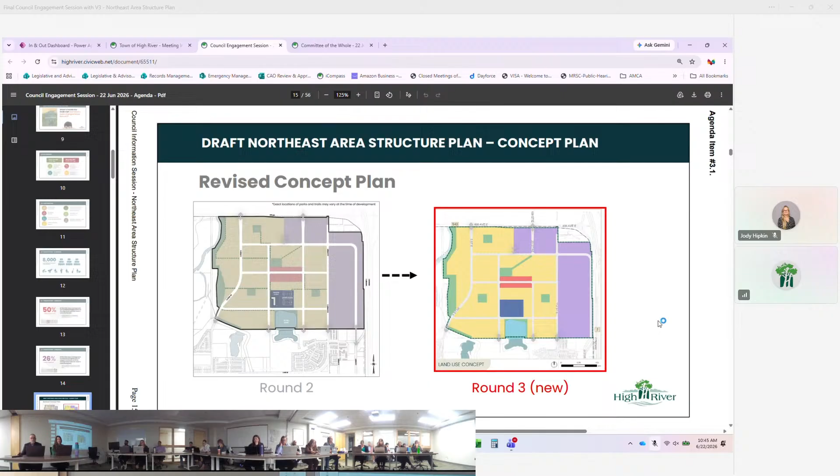This was the concept plan from round 2, and then it shows how the plan has evolved to round 3 after presenting 2 potential designs to the committee of the whole. The following slides will go through those changes.

The frontage road has been pushed closer to the highway to avoid conflict with development that has already taken place. We are still investigating the pipeline easement.

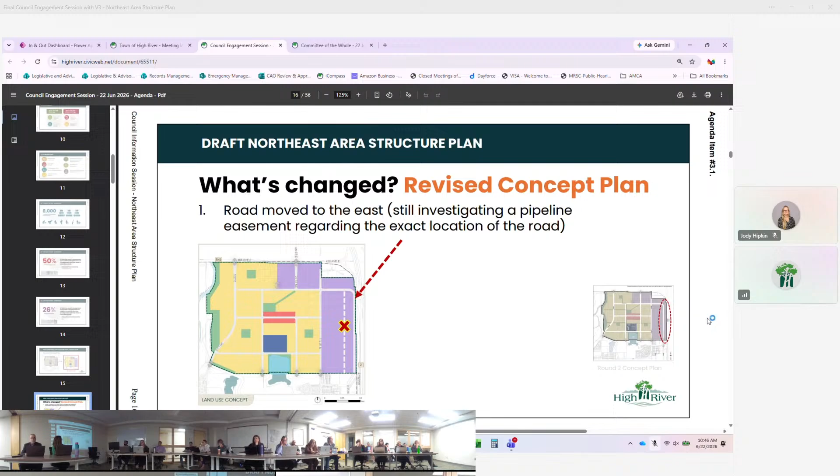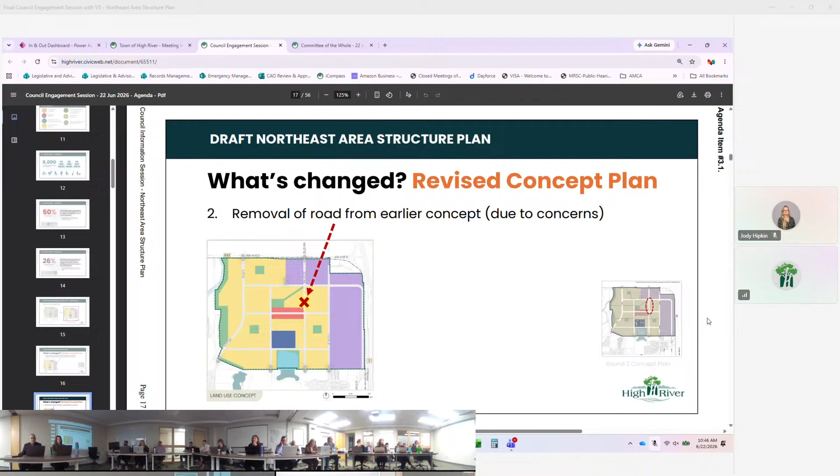20th Street Northeast is no longer shown as a through street, and that is to prevent trucks from taking that route directly south through a residential neighborhood.

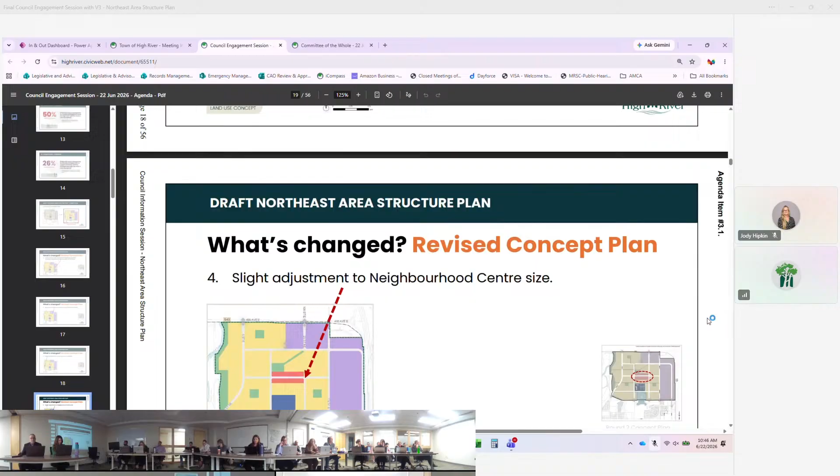The green space on the west side has been adjusted slightly. And the size of the neighborhood center area has been reduced.

Next, we will go through some policy highlights, and we will focus on these key sections throughout the next slides.

For traditional neighborhood district policy highlights, this land use is going to allow for a mix of residential, home occupations, institutional uses, and neighborhood scale retail consistent with the town's land use bylaw. The minimum density is 20 units per hectare, and that is in accordance with our town plan.

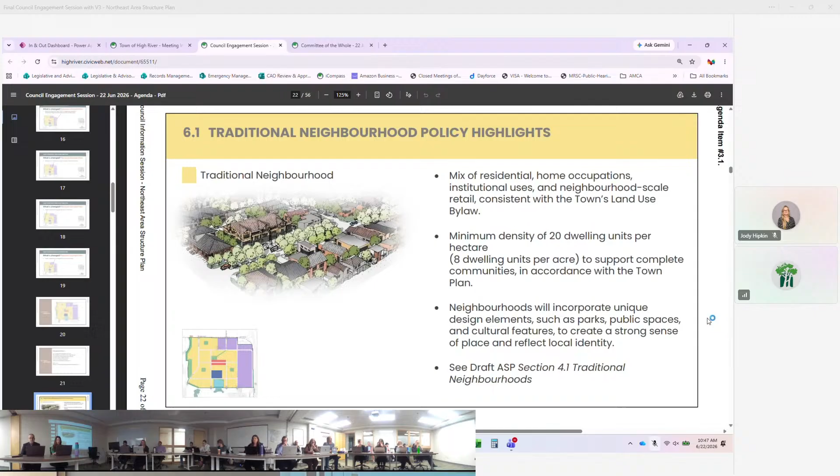Neighborhoods will incorporate unique elements such as parks, public spaces, and cultural features to create a strong sense of place and reflect local identity.

The next slides will go through employment area policy highlights. There are two employment areas within this area structure plan, employment area 1 and 2.

When redevelopment occurs, any new development must comply with the policies and requirements of this ASP. When a property is subdivided or a development permit is issued, landowners will be required to dedicate any public road right-of-way identified in this area structure plan.

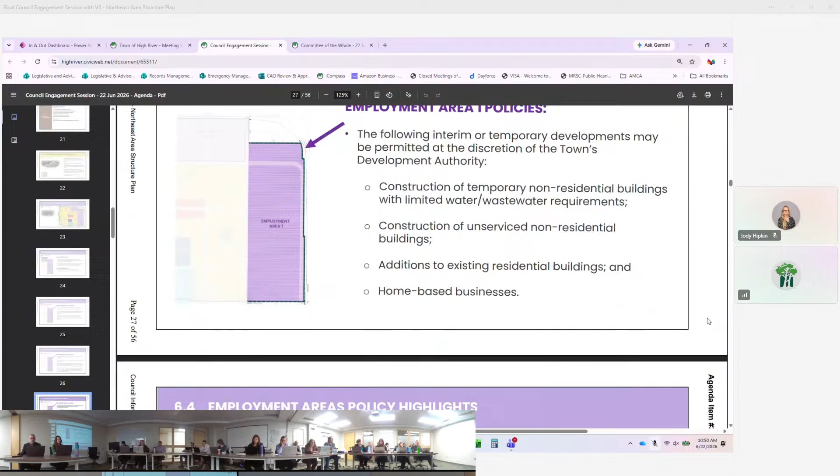At the time of subdivision or development, landowners must provide the town with a concept plan or master plan for the subject site and show how that site and the proposed development will connect any adjacent sites and future roads and developments.

Next, we will pivot to employment area number 2. All areas within employment area 2 will be fully serviced with municipal water, sewer, and storm servicing.

Interim servicing options will not be considered. There must be an adopted neighborhood outline plan before subdivision or development. Next, we will move to the neighborhood center high street policies.

The high street area shall be designed with wide sidewalks, street trees, seating, lighting, and weather protection to support year-round activity and contribute to a pedestrian-oriented environment. The high street should be planned and developed as a mixed-use corridor, incorporating retail, service, or similar uses in a compact pedestrian-oriented format. Mixed-use buildings along the high street shall provide active, ground-oriented ground floor frontages, corner lots with key frontage locations, shall include ground-level commercial or service-oriented retail uses, and there are further policies in that section of the area structure plan.

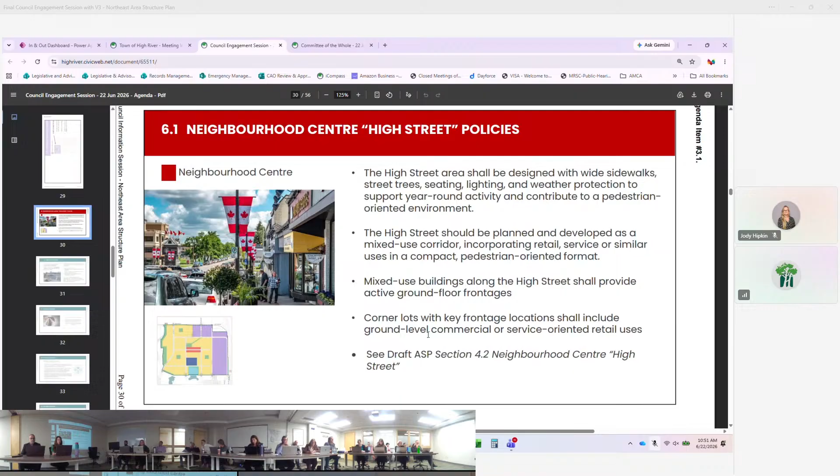Next slide, please. Moving on to some of the technical requirements that went into the area structure plan.

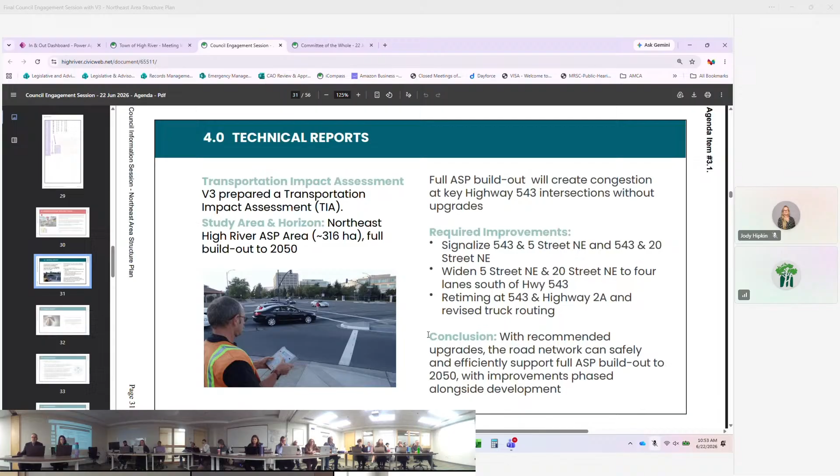Looking first at the transportation side of things, a transportation impact assessment was prepared by V3 within the entire study area, the 316 hectares, looking at a full build out to 2050. As expected, the intersections at the north off of 543, 5th Street and 20th Street do require some upgrading work, specifically widening of 5th Street and 20th Street to 4 lanes each south of Highway 543, and retiming of the intersection at Highway 2A and 543 related to a revised truck routing. With recommended upgrades, the road network can safely and efficiently support the full area structure plan build out to 2050, with those improvements based off of phasing of development.

On to the next slide, the functional servicing studies. There were functional servicing studies that looked at the stormwater, the sanitary system, and the domestic water system. I'll be moving into each of those, starting with the potable water, the domestic water system.

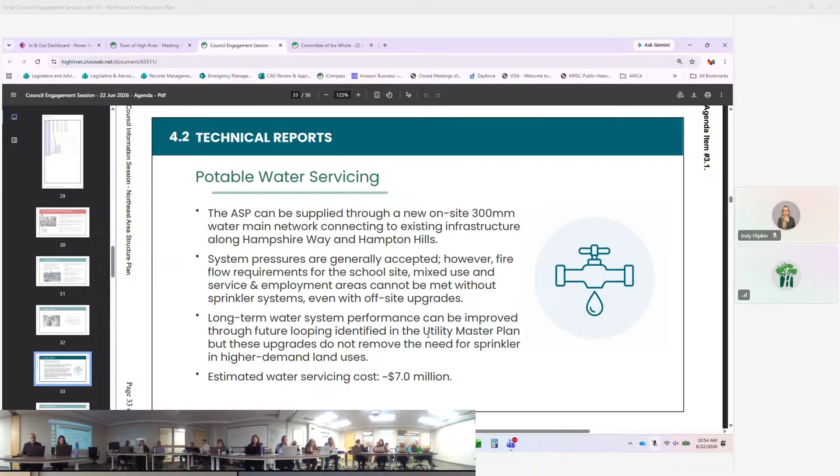It has been found that the area can be serviced through on-site 300 millimeter water main networks connecting to the Hampshire Way and Hampton Hills infrastructure. The system pressures are generally acceptable. However, fire flow requirements for the school site, mixed use, and service and employment areas cannot be met without sprinkler systems, even with some off-site upgrades. Long-term water system performance can be improved through future looping, as identified in the utility master plan, but these upgrades do not remove the need for sprinklers in those higher demand land uses.

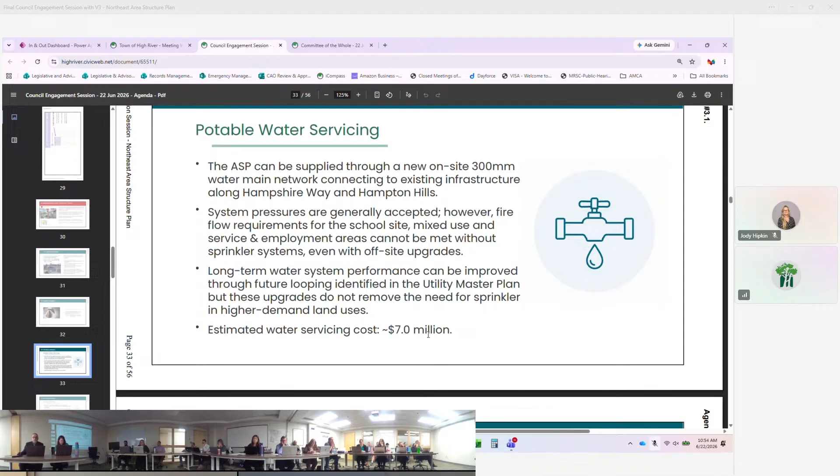The estimated water servicing cost is approximately $7 million. Within the studies themselves, there is a 30% contingency that has been added onto the estimates, so that $7 million does include that 30% contingency pricing.